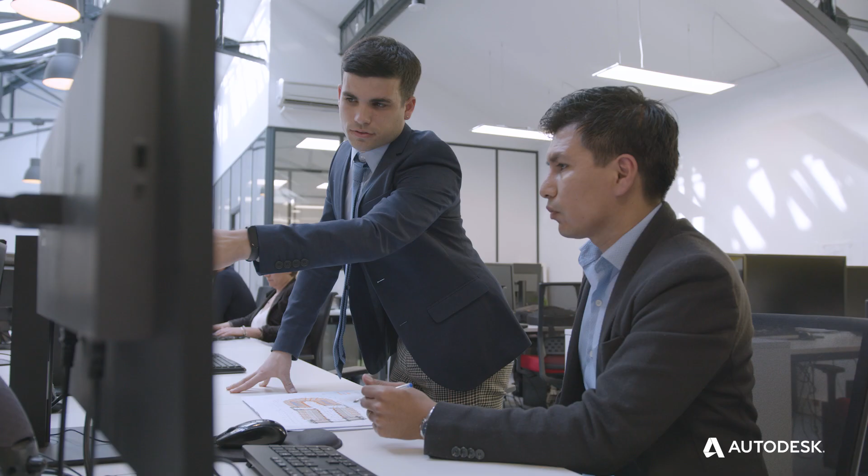On se souvient tous du 15 avril 2019, du sinistre. Je me rappelle avoir pris très rapidement conscience de la complexité de la mise en sauvegarde de Notre-Dame. Très vite après l'incendie, Autodesk nous a sollicité pour réaliser un modèle BIM de Notre-Dame de Paris à partir des données qu'on avait déjà constituées avant le sinistre, et avoir une maquette telle que construite.

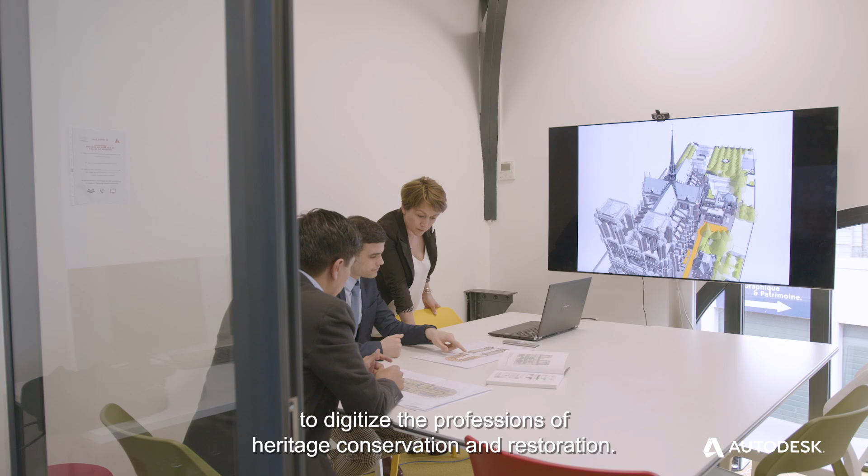Je suis tailleur de pierre, restaurateur monument historique de formation. J'ai notamment travaillé en tant que technicien des méthodes sur les chantiers de restauration sur Notre-Dame de Paris dans les années 90. Ensuite, j'ai fondé Art Graphique & Patrimoine en 1994 pour amener les outils numériques au métier de la conservation et restauration du patrimoine.

Chez AGP, nous avons une équipe pluridisciplinaire qui a une connaissance fine du patrimoine architectural et historique. Notre savoir-faire, c'est l'interprétation intellectuelle et technique d'un bâtiment. On est la seule entreprise dans notre secteur à avoir le label de l'entreprise du patrimoine vivant. On fait partie aussi du groupement des entreprises de restauration de monuments historiques, avec lequel on a toute une réflexion globale sur ce qu'est la restauration du monument historique.

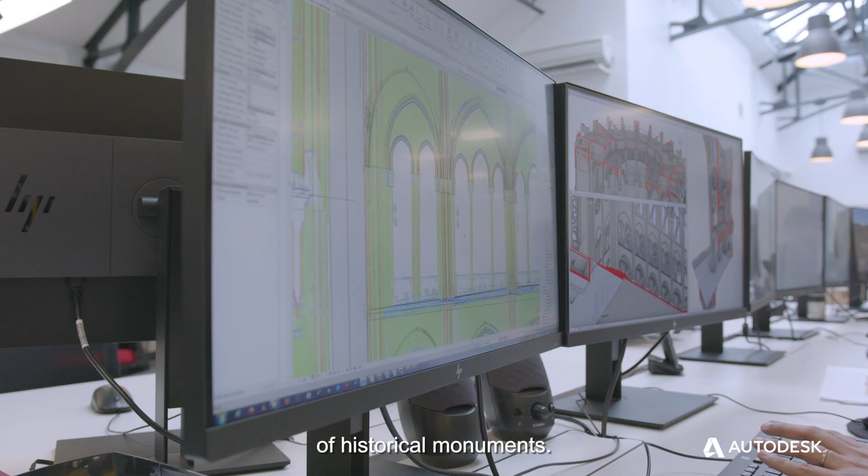En 2010, on est intervenu avec Andrew Tallon pour faire un relevé, entre guillemets, global de Notre-Dame de Paris. C'était un relevé assez complet.

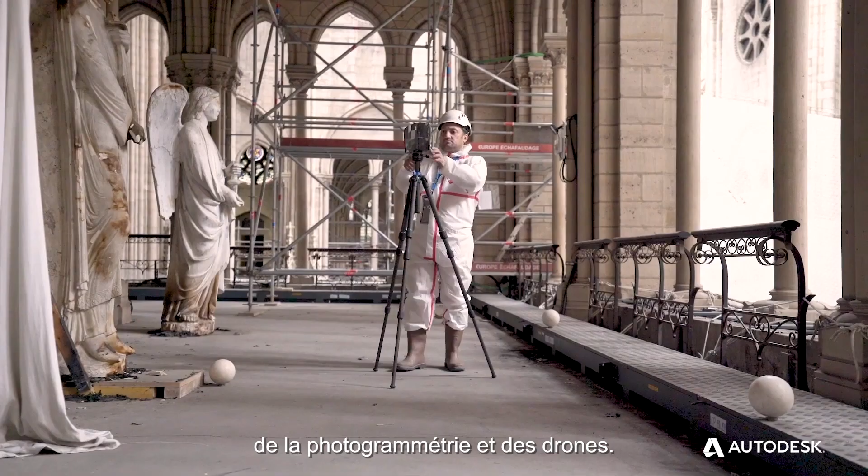For Notre Dame, our BIM process included the survey of the site. This was the laser scanning, the photogrammetry, and the use of the drone. It's almost like an X-ray of the surface. And this led us to create the 3D BIM, which is the 3D geometry as well as all of this information included. Notre Dame itself is a very challenging project.

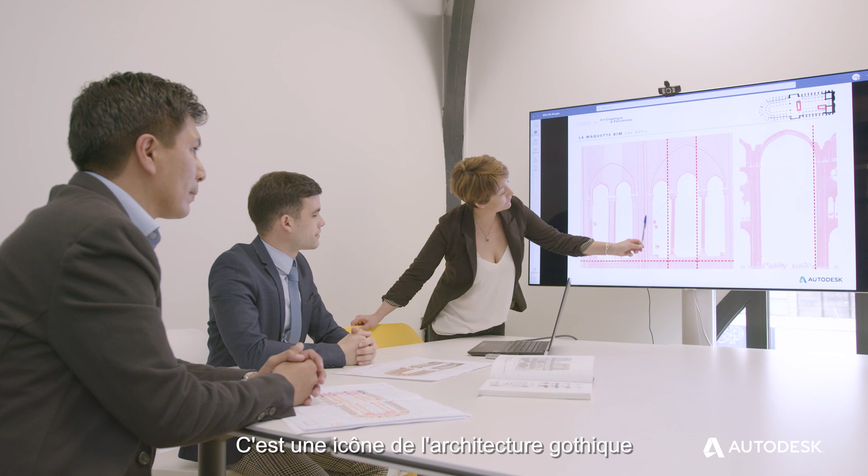It is an icon of Gothic architecture in which nothing is straight and nothing is rectangular. A good example are the vaults. There's over 180 vaults and none of them are identical. Every one of them has to be modeled individually.

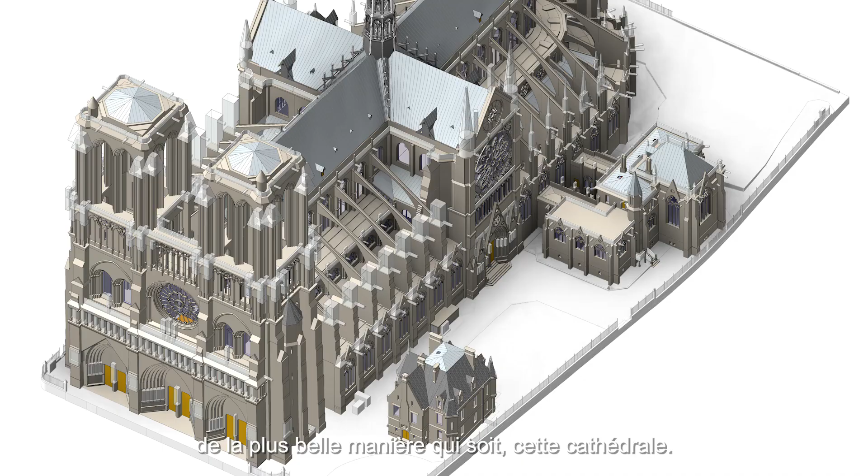And the final challenge was how to combine the savoir-faire, the working expertise here at AGP, with the realities of Notre Dame. How we can use our knowledge with stonework and software in order to represent this cathedral as beautifully and as intelligently as possible.

BIM is undeniably a technology that contributes to the safeguarding of our heritage, and we consider BIM itself as a form of preservation, as a snapshot of these historical monuments in time.

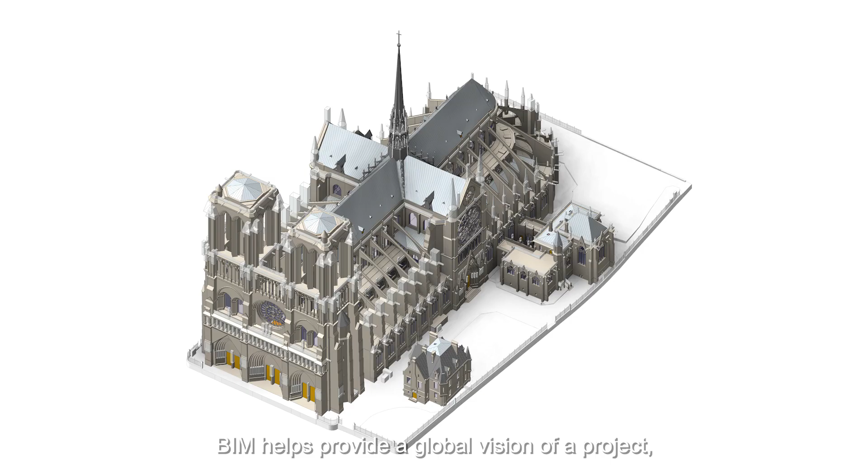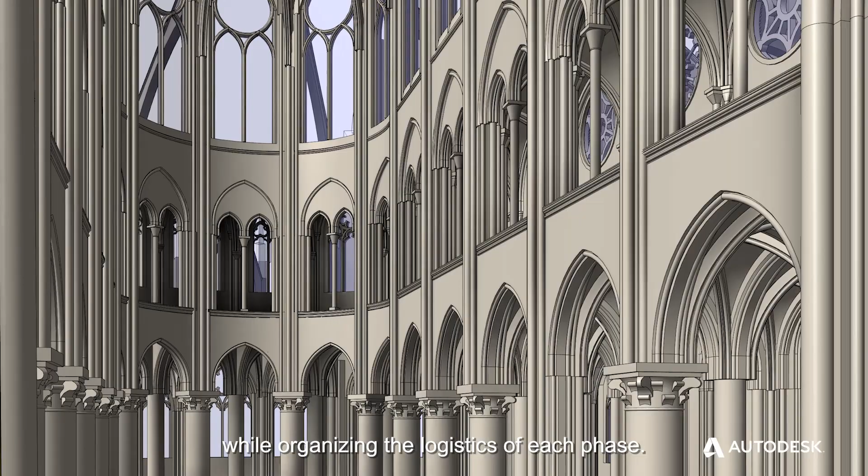On peut dire que les atouts et les applications du BIM sont nombreux. Le BIM nous permet de donner une vision globale de l'édifice tel que construit, de planifier et coordonner le chantier avec les corps d'État qui vont collaborer pendant la restauration de l'édifice, et en même temps de faire la scénarisation de ce projet de restauration. En résumé, la maquette intelligente issue du BIM devient une nécessité pour la préservation du patrimoine.